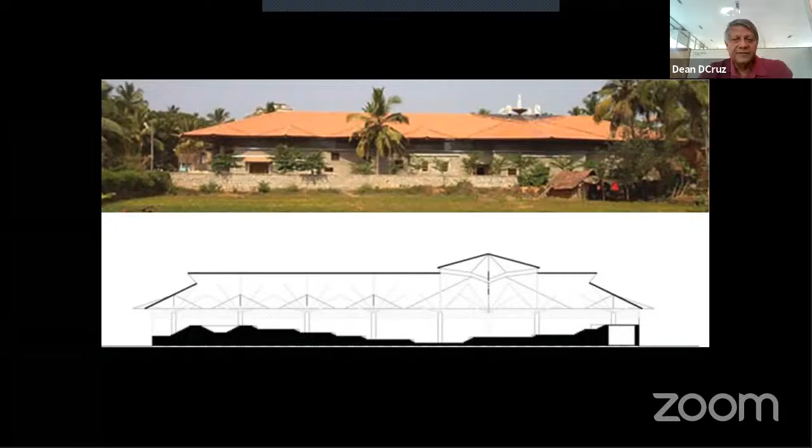And the enclosure was, of course, local granitic stone that's available. The walls of the cathedral are actually non-structural. They're just partition walls. They just wrap around the building. And the whole cathedral is like an amphitheater. It's like steps up and down. And the roof just floats above it. So you can see the roof. So it's tree-like in nature, and the walls are just partitions on the outside. And being a cathedral, the walls actually define small chapels, which are on the edge of the cathedral.

It has a steel main framing system, but it also has a wooden roof. So again, we're recalling crafts. The nuns of that particular parish even did the stained glass. The priests actually carved the wooden doors. So it was a completely participative process of construction.

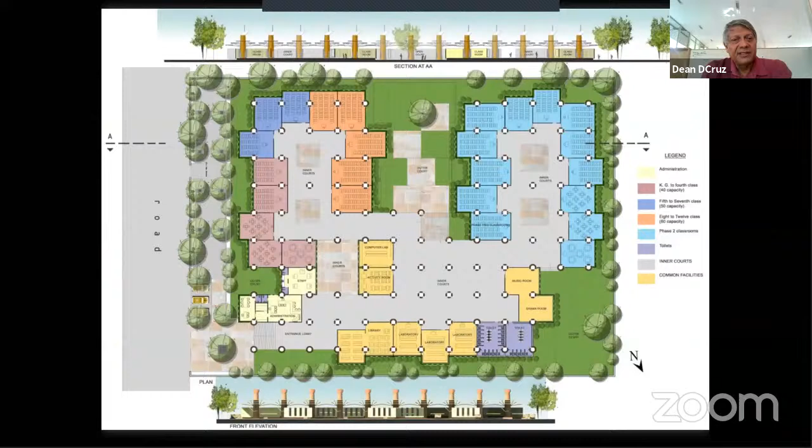This is a project we're doing in Bijapur with the same principle of creating these trees here. Now, Bijapur is a hot and dry climate. So we decided to respond in terms of cooling the building by means of evaporation. So we had these towers, which were like trees in a way, and they're made out of brick, which is a local material to Bijapur. And they're supposed to draw in air at a high level, hot and dry air. You humidify it by spraying a water mist on it, and it's taken down into these column flues and enters the building and cools the building.

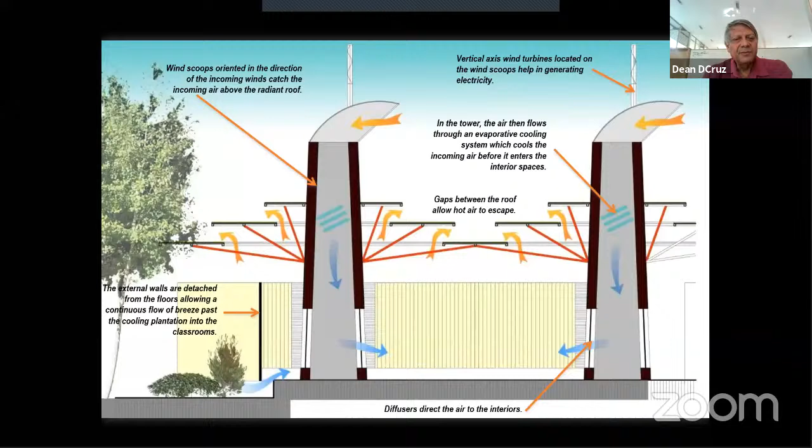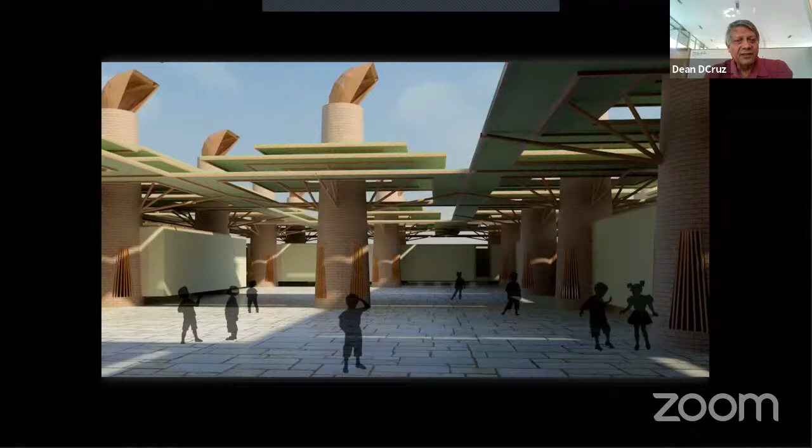And the building is completely flexible. As you saw from the plan, it was just a grid of towers, and you could actually change your walling systems around. So the walling systems were lightweight, soundproof partitions, with which you could keep on flexing the size of classrooms, location of different rooms in the building, so a great amount of flexibility. So slowly, I started transitioning back from the very earthy, down to earth Laurie Baker thing to actually looking at an architecture which had a bit of technology thrown into it, creating lightweight structures mixed with the permanence of, say, the brick towers in this case.

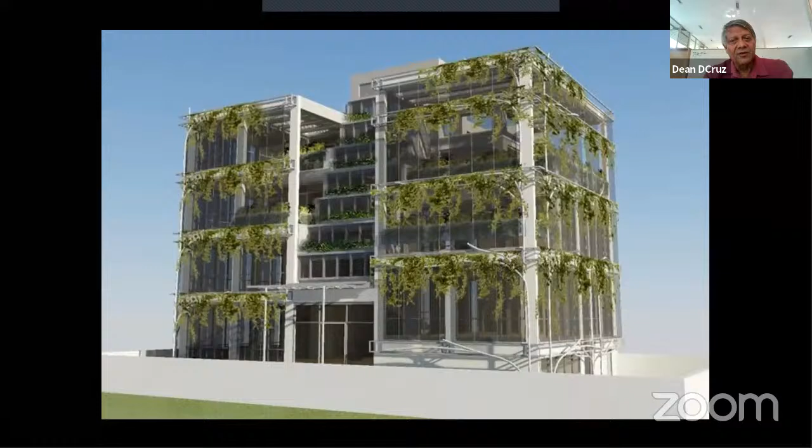So this building is also another transition back to that high-tech architecture. It's a building in Noida, which is stalled at the moment, but it's a hollow column, hollow beam system. So the columns and beams are made out of steel, but the framework of steel is like a hollow box in which all our services run. So rather than cling the services to the side of the building, or under the slab or above the slab or cutting through walls, they actually ran through the structural elements, including the air conditioning system. So everything ran through the column or the beam.

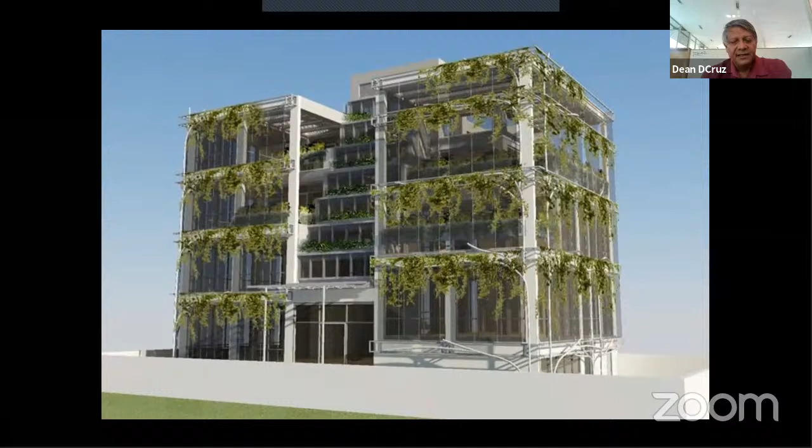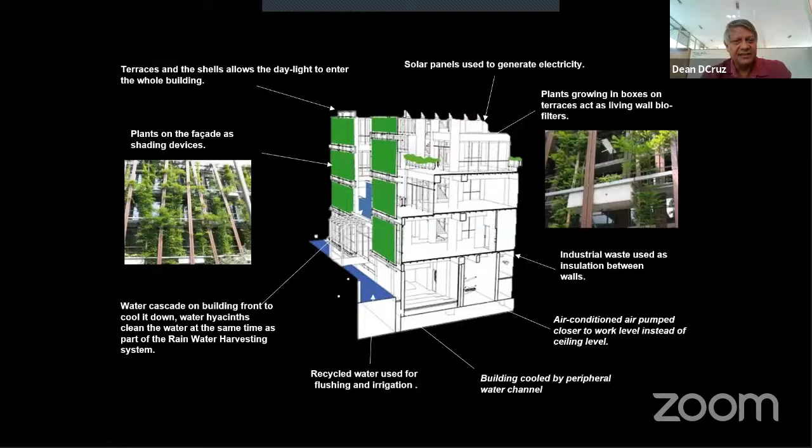So even the air conditioning system was a high velocity system like you have in an automobile or a bus. And the air came directly to where you were sitting as well. So the amount of energy usage was kept to a minimum. That's the system. And these are the various sort of interventions we are planning to use in the building in terms of solar pergola, green wall, underground cooling systems, thermal radiation systems in the building that we plan.

I mean, the learning of sustainability actually started years before that, when we were shortlisted to do the Pune Sustainability Center. This was supposed to be a demonstrative center for sustainability, and in an active way. This is almost 15 years ago. And we're supposed to demonstrate how sustainability can work in the public domain so people could be influenced and start

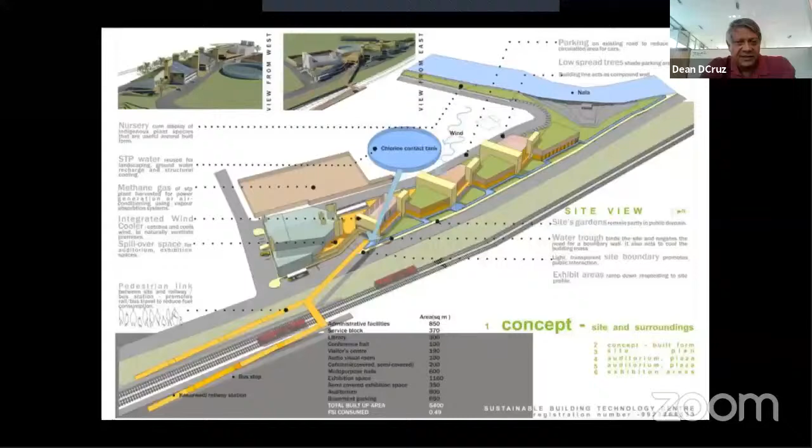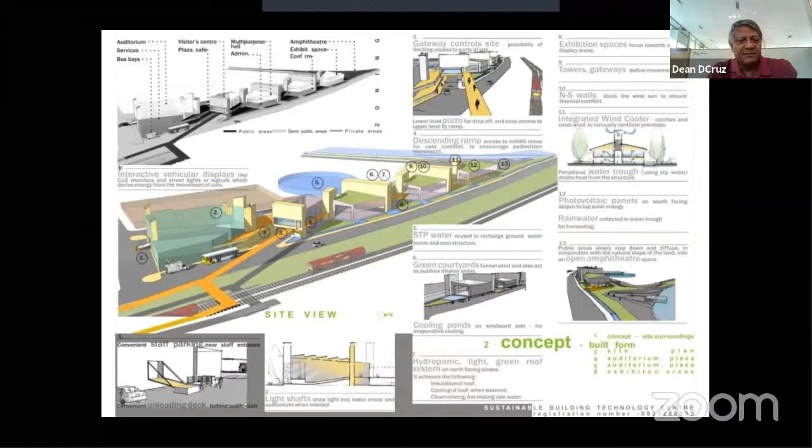using these systems. So whether it's solar energy, other passive cooling systems, new materials, new technologies that could be incorporated in the building, underfloor cooling systems as well. So all that was incorporated. So even the auditorium had a top lighting system, an underfloor cooling system, and all connected in a sort of museum of sustainability. A great learning for us.

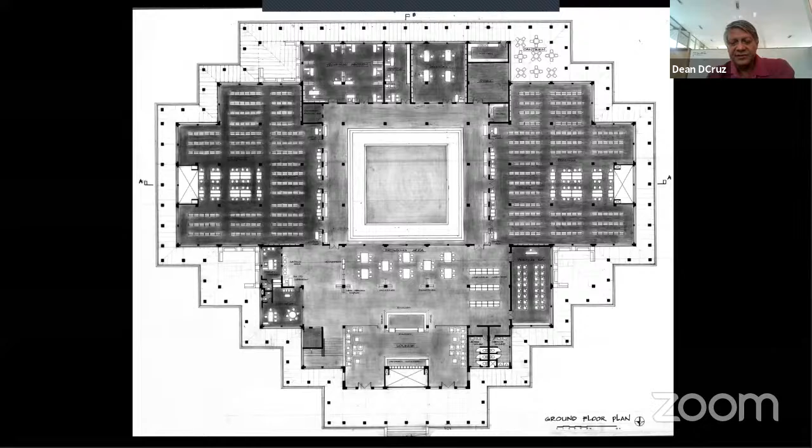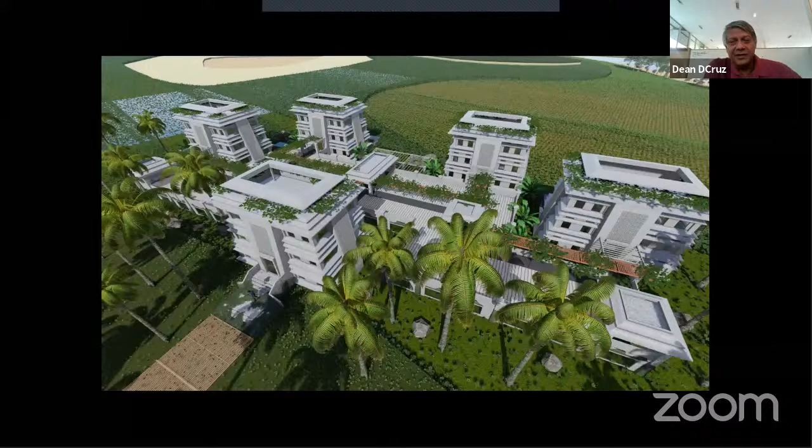So this is a hotel project that we're also doing now in Hampi. Again, how do we take the traditional stone building systems and create a thing? So it's a 3-level room thing, but again, it looks like traditional architecture built completely out of stone. And the whole idea is that the greenery actually takes over the building. So it almost looks like a ruin, a new ruin in a way.

Kerala has been another big influence for us, as you saw in the houses. And we were assigned to do a few spas for the Taj, and they were Ayurvedic spas. So we saw the Ayurveda came from Kerala. So why don't we look at the Kerala temples where all these sort of treatments originated from?

So in this spa, which is basically an old sports building which we completely gutted, we decided to respond to what Kerala architecture is about and what temple architecture particularly is about. And so what does the temple architecture have? One of the primary things it has is actually a sequence of spaces from a bright, taller outer space to a darker, more intimate internal space. So we said we needed to respond to that transition from the outside to the inside. And the outside of the building also looks very much like a Kerala temple.

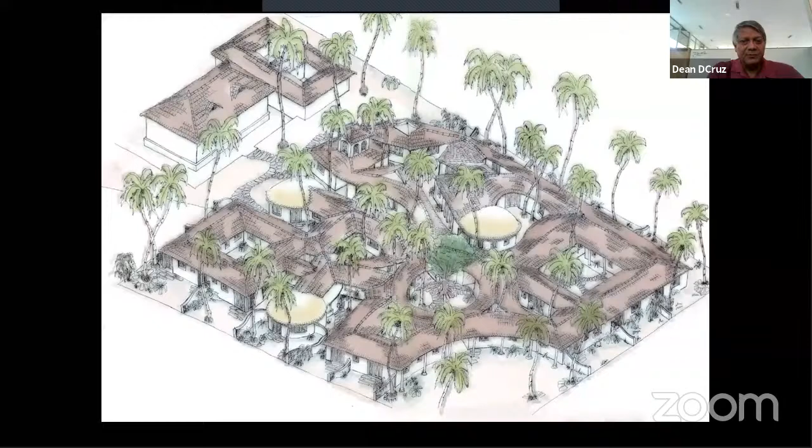So you had these streets that moved around the place. And from the street, you'd enter a square courtyard, circular courtyard, crescent-shaped courtyard, star-shaped courtyard. And each courtyard led on to various other rooms, and each room was unique in nature.

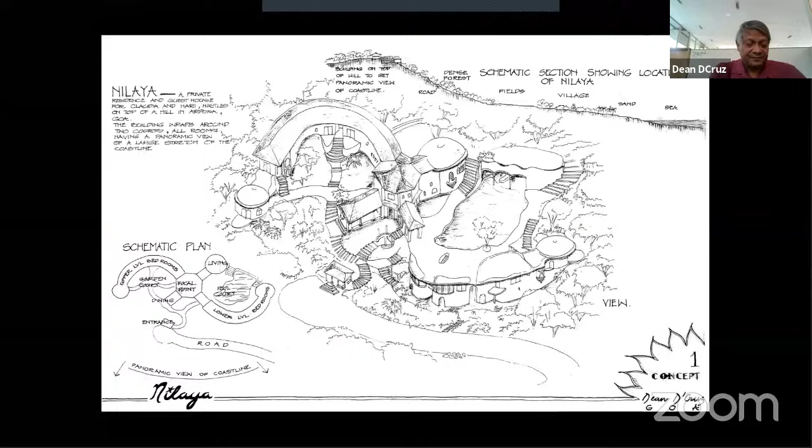This is a project called Nilaya, which was built almost 25 years ago. It was one that launched us into recognition. It was rated one of the 100 best small hotels in the world at that time. And it's built right on top of a hill, so it was difficult to get materials on top. So we excavated this pool. It's a giant pool, and all the rock excavated was actually used in the construction of the building.

It's a very east meets west sort of appearance, but again, we use that concern for the environment and our concern for restoring craft. So everything is masonry in this building. This dome, for example, is about 11 meters in diameter. It's built completely out of mud bricks with just a cement plaster on top to waterproof it. And again, traditional flooring systems in the space. There's only one concrete column in this whole building, which is where the master suite of the hotel is.

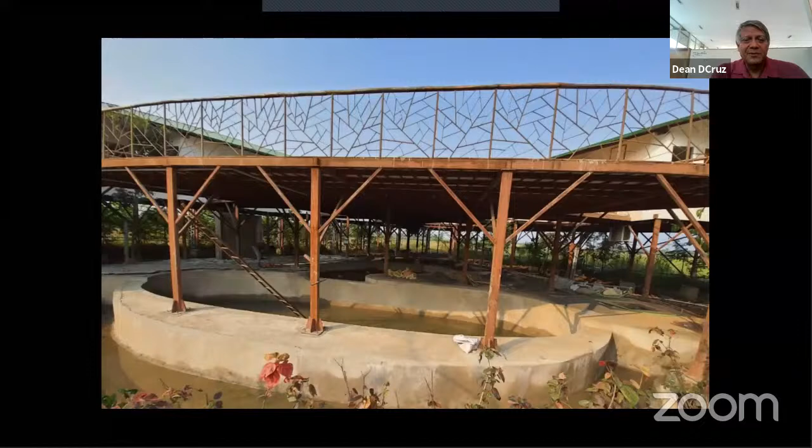This is a resort which is just being completed again in Kanha, where again it's connected to nature as far as possible. There's one that's just being completed in Tadoba. In this one, it's a very lightweight thing. So everywhere we try to sidestep a little and try and use innovative methods. The whole resort, it's still not completed, is off the ground. The whole thing is elevated, and it allows nature to flow through. The whole idea is that animals can actually pass under this thing, and you can even observe them from above.

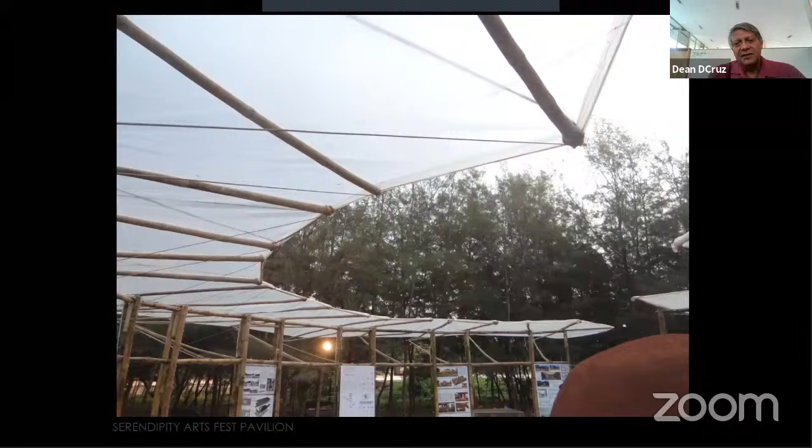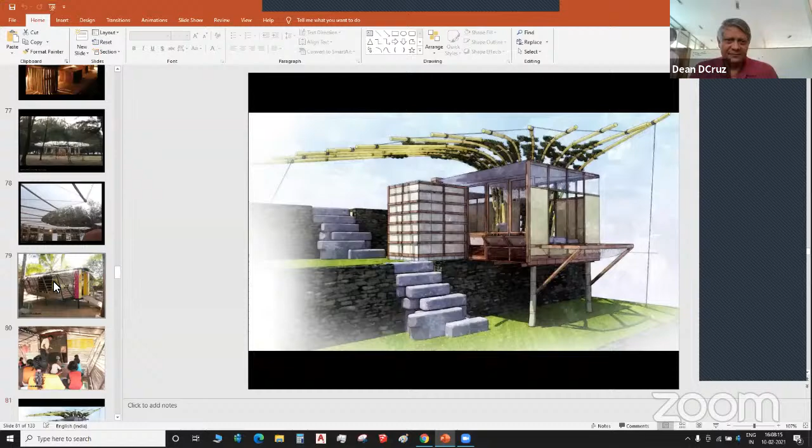I think there's some problem at his end, some network issue. So kindly have patience, and I think he'll be back soon. Yeah, he's back. Meenal, unmute him, please. He is back. Okay. Yeah, yes. Very good. Yeah. The connection got unstable. So which of the last? Yeah, this one, sir. This one? Okay, fine. Yeah.

Okay, so basically, this was what we call the moving school. So basically, it's an architecture that actually moves. I talked earlier about an architecture that's temporary in nature. What about an architecture that moves and is movable? So we did this for the Dan Aid Agency, which actually takes care of children of construction workers. So the children are able to get a continuous education, because the school moves with the construction workers as well.

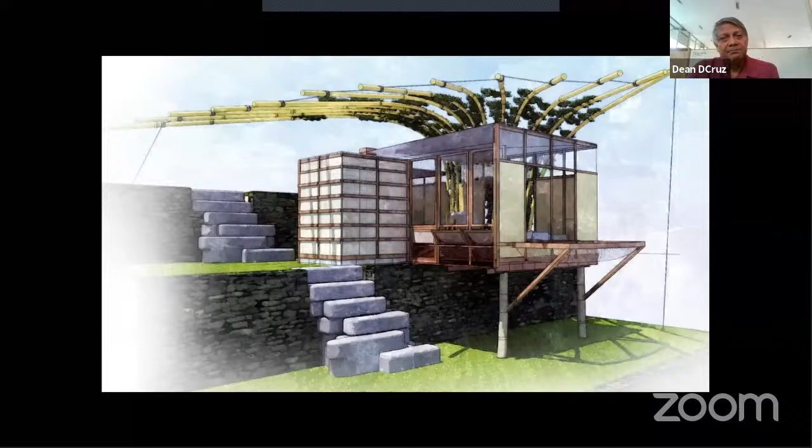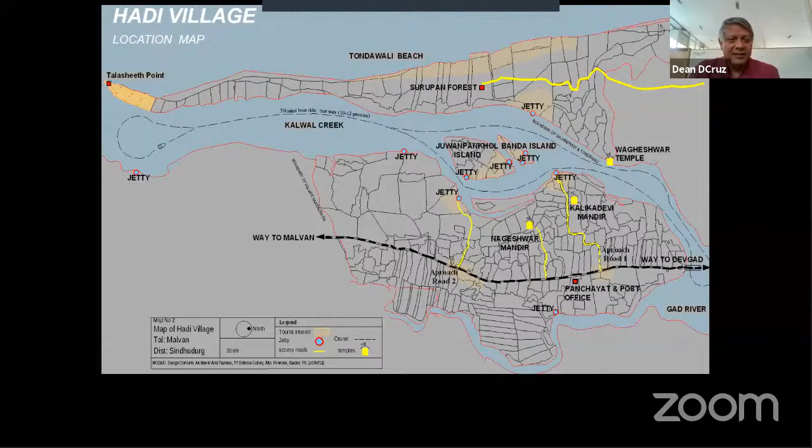But at times, it doesn't mean that we even have an architectural solution. So this is a project that we did for the Maharashtra Tourism Development Corporation. They wanted a 40-room hotel, and we said, because MTDC basically wants tourism to happen in a place, why don't we give tourism to the people? And this particular village of Hadi, which is a beautiful village, has farmers, and it's got the fisher folk. So for the fisher folk, we designed these little floating hotel boats where they can come together and form a mini hotel of their own on the water, and daytime, move away from each other, nighttime come together and cluster.

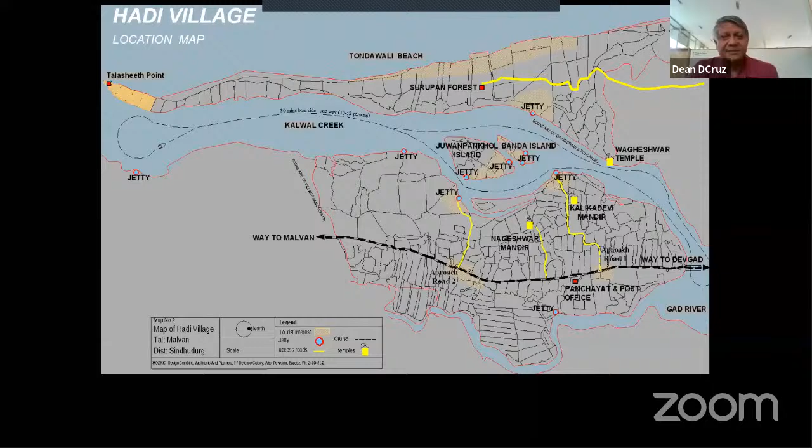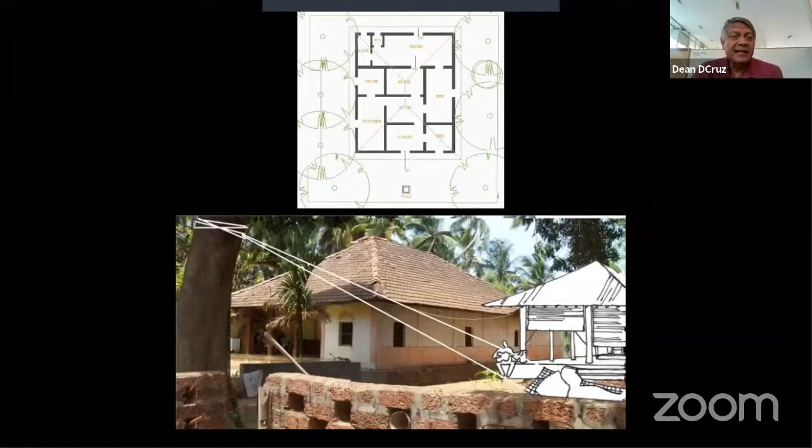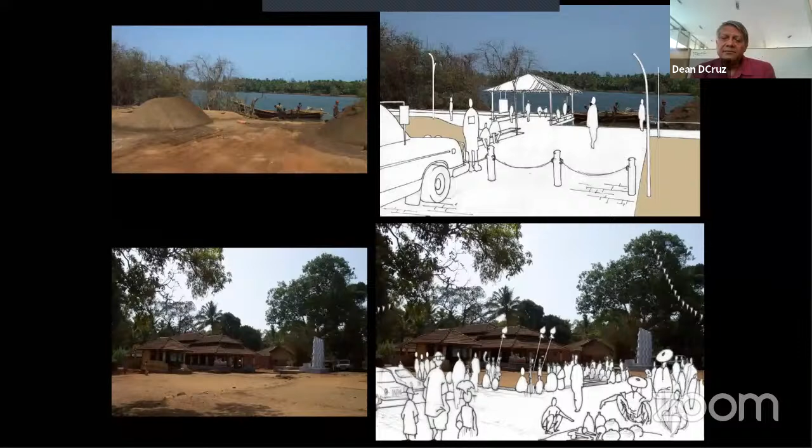And the car, despite all the ills that the car brings to the city, is still being pampered and making a city car-centric, where instead we should be really looking at mass transport systems. And the human level of things, pedestrianization, everything is being lost because of this automobile, sadly.

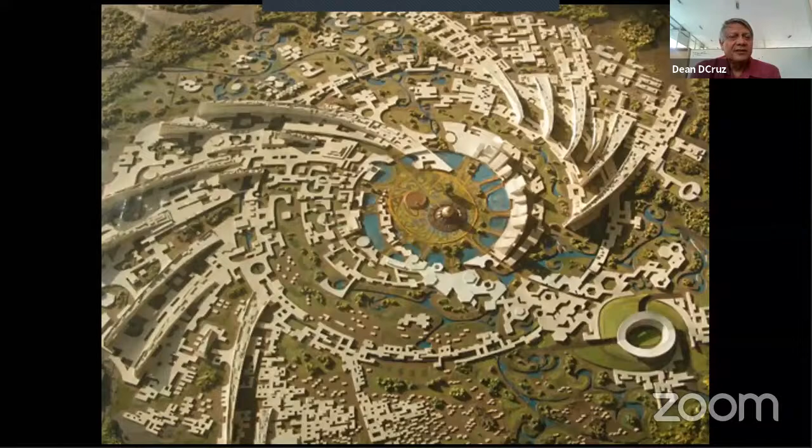But there is hope. A lot of times we see interventions, for example in Auroville, where they actually look at cities which are far more people-friendly. This is the Galaxy, which is proposed in Auroville. Unfortunately, Auroville hasn't been that successful in implementing the Galaxy model. There's a more informal model in Auroville being implemented, which is just really these clusters of communities, which is actually quite interesting because they form much more stable, much more coherent, much more likable and workable communities, rather than a very one-man top-centric planning system in a way.

So different people are trying different things. This is proposed by an architect called Tay Kheng Soon, who I met, for what he calls a modular city for Singapore. Though Singapore is fully developed now, he had said, what if we had a chance to actually redesign Singapore? How would we do it? How would we make it a walkable city? So he proposed a 1 kilometer by 1 kilometer city where he put the mechanized economy, which is basically industry and manufacturing and everything, in the center.

And you think that's very bad because industry and manufacturing is very polluting and very energy intensive. But the moment you do that, you're actually able to provide power, take away waste from that area. You make sure that pollution doesn't occur. And since this city is just 1 kilometer by 1 kilometer, you're never walking more than 500 meters from the edge of the city to the center of the city.

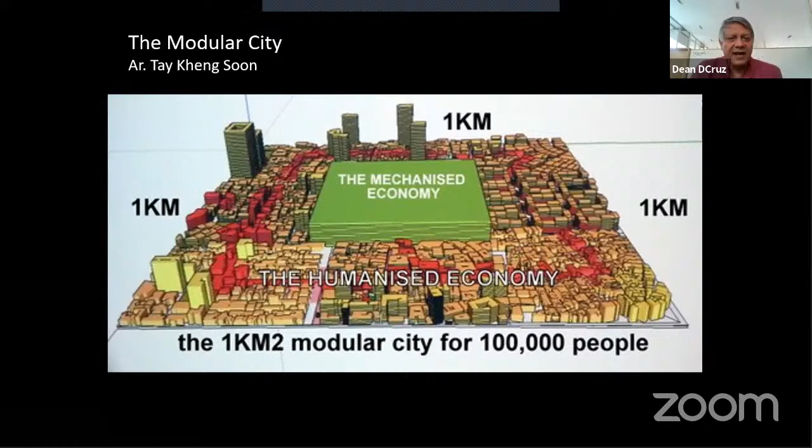And so peripheral to the industry is the commerce section, then there's shopping, and beyond that, there's the support system of schools, of hospitals, and everything that people need as a support system. And then peripheral to that is the settlement areas of housing. And beyond that is actually open fields. So because you're able to create a dense city, you're creating so much more open space.

And all the cores of the city, that mechanized economy, as he calls it, are connected by high-speed transport, high power systems, that actually connect up. So you're freeing up a lot of land in these particular areas.

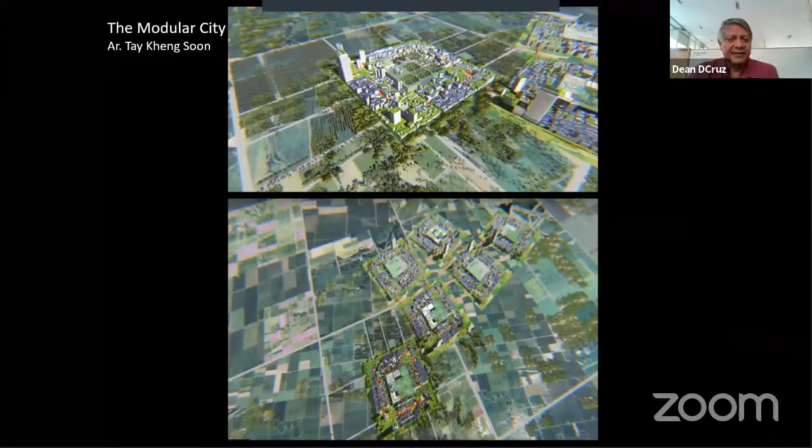I had a chance to visit the city called Hammarby, just outside Stockholm, which is actually what they call a brownfield project, an old industrial estate. And so they decided to actually look at sustainability. And this is green building today. Especially with the crisis that we have in the world, we should all be designing green buildings. We should all be looking at sustainability. We should be concerned about the climate change issues of global warming. We should be concerned about the social strife that we see all over the world happening because of bad planning.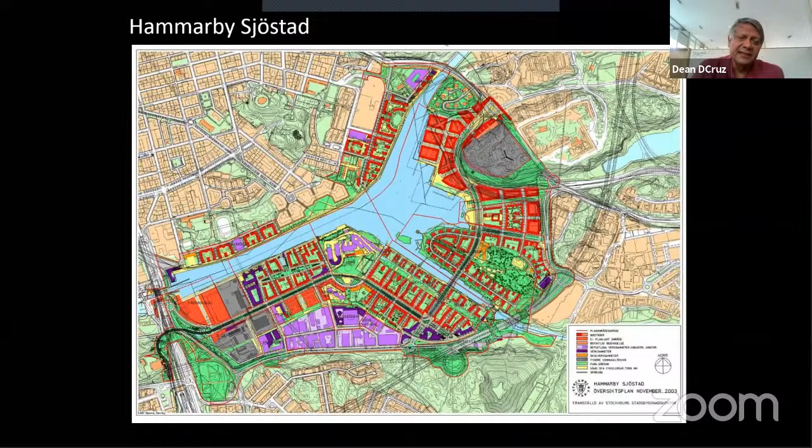So these concerns really worry me, and so I keep on looking at cities and how we can actually, as architects and designers, understand what happens, how we can intervene, even at a small level in them. So Hammarby is one place where a few architects got together and they proposed a city which is very low rise, so very low buildings, but they had all the basic principles of sustainability: of energy, of water, of how do we create community, how do we exchange economies in the place.

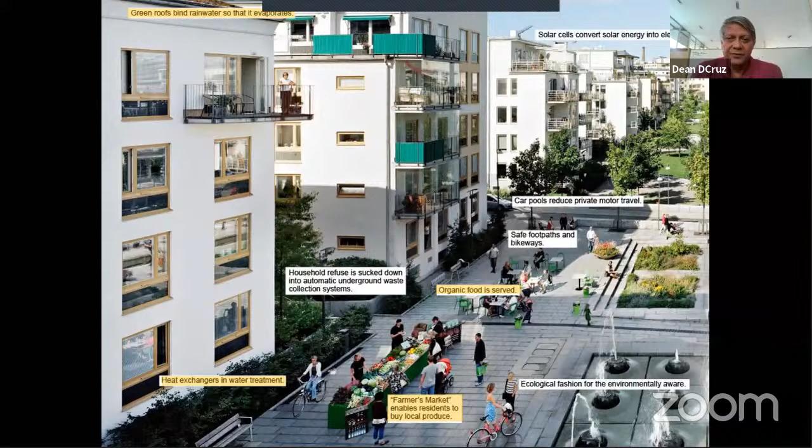So everybody had their own gardens. Even though you're living in an apartment, you had a garden patch where you could grow your own food and vegetables. You had an opportunity to actually share that with the community. So whether they were producing clothes, food, anything else, it was all ecological in whatever output they had. And the buildings are high density, low rise. So it doesn't mean an inefficient system.

Because actually they say the most efficient building, even if you want to create a high density, is a 4 or 5 story building. It's almost a walk-up building. Multi-story buildings, besides being menacing and inhumane in the way they connect to the ground, are actually inefficient. So a higher footprint of buildings, but on a low rise, is really the way to go.

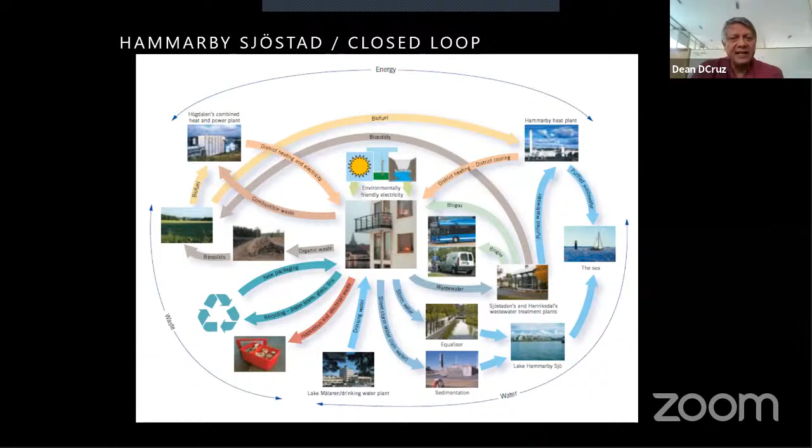And it's all about creating closed loop systems. It's all about how do you look at energy, how do you look at waste, how do you look at water, and keep on recycling it within the system. And that's the most efficient way to go about it. So this city completely demonstrated that. So about 13 years ago, I'm not just an architect.

I'm also what they call an activist, somebody who actually spoils the fun of people who want to make a lot of money at the cost of the environment. So I'm part of the Goa Foundation, which is actually an environmental legal group. And so a lot of the laws that you see today on CRZ, on forests, everything for the whole of India, have actually come through PILs filed by the Goa Foundation, which are now applicable throughout India. Of course, they're being subverted now with a government which doesn't care very much for these things, but the fight is on completely.

So I was really fighting against the regional plan that was very bad for Goa, the 2011 plan. And so for the first time in the history of India, we managed to block the plan and revoke the plan. So as punishment for that, they put me on board to prepare the new plan along with Charles Correa and Edgar Ribeiro. I'm not a trained planner, but it was an extremely interesting exercise to go beyond architecture, into the area of planning, and look at how we can really influence lives in a much greater way.

So we looked at what are the assets of Goa. You don't have to be a planner to be concerned about everything around you. An architect needs to have the sensitivity to actually look at what are the assets that we have around us. What do we need to preserve and protect? Because when we design a building in a plot, we're not just affecting the plot that we build on. It's also the environment. Where is that plot getting its air from, its water from? We need to look at that. So Goa has the assets of beach lands, forest areas, fields, orchard areas, water bodies. All this needs to be protected.

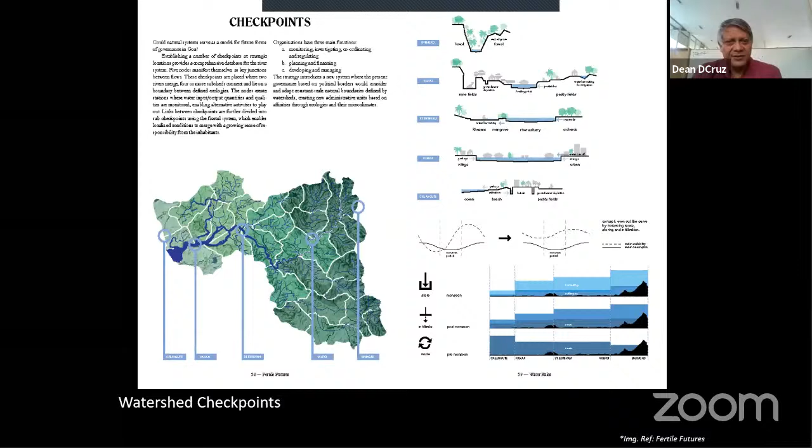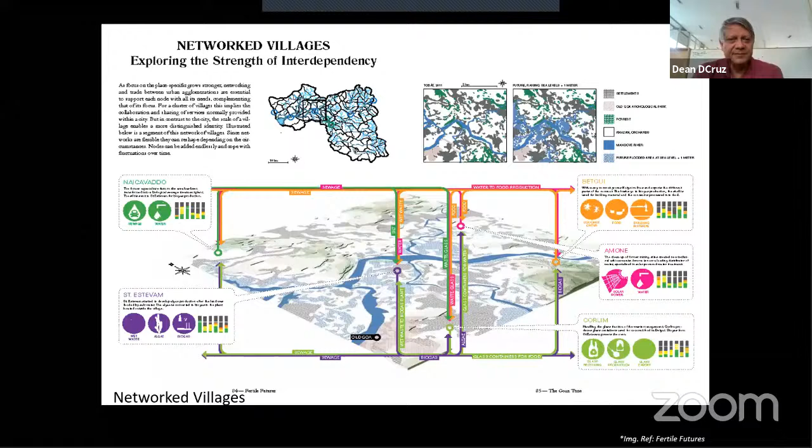We did this along with the Royal Institute of Art of Stockholm as an exercise. They sent their students down, and we developed these thoughts with their students, looking at watersheds, how they affected villages, and how villages could interdepend on each other using these fractals of development of villages. Because the village is actually a unit of development. Every village in Goa, and maybe throughout India, is completely independent and autonomous. It has water bodies, fields, orchard areas, animal grazing areas. It has an economic model.

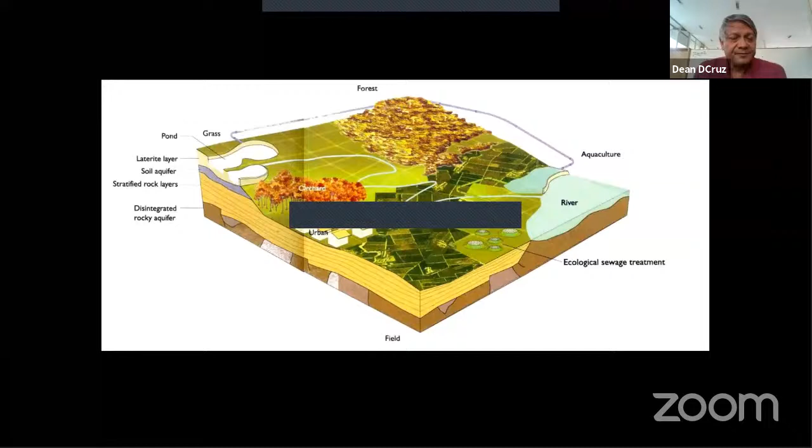So when we looked at development, we needed people to understand what development is about. So for the first time in the history of India, we decided that if we are preparing the regional plan, we have to give it to the people. We have to make them understand first, and then let them decide what their future is going to be like.

When we talk about development infrastructure, a lot of people think infrastructure is all about roads and buildings and power lines and factories, which it is, but it's also about what we call green infrastructure: where do we get our water from, where do we sequester our carbon dioxide, where do we get our food from, where does our waste go. All that is infrastructure as well, and that's green infrastructure. And the green infrastructure we need, which we think is empty space meant only for future building, is needed by us.

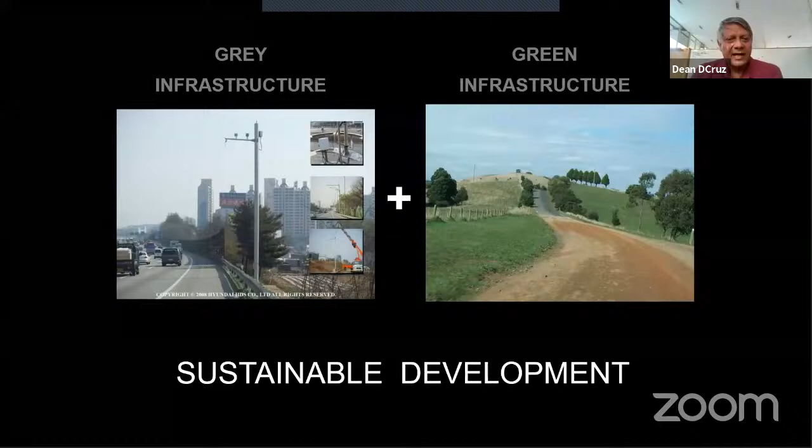And we need to map that and protect them. And so those were the eco-sensitive zones, you could say, in a way. So those times we used Google. There wasn't much of GIS systems over here. So we used Google to actually allow people to understand what the lay of the land was and what they were looking at, how they protected, to understand what basic planning was about.

And we helped villages actually prepare their own plan for the future, where roads were, whatever, but things which affected them. So in this particular village, they mapped all the nature trails, they mapped the bird nesting sites, they mapped all the big banyan trees in the village. So all these things, they mapped their aspirations. They mapped where they would like a forested area, where they would like a particular type of crop to be grown, where they would like water harvesting to happen.

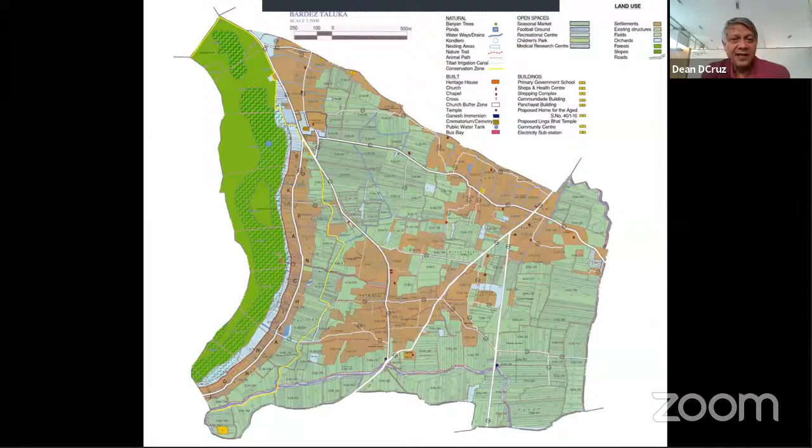All that was mapped. So suddenly you transition from just being an architect, designing on a simple piece of land, to actually helping people change their lives at present and the future lives of the younger generation. So they actually mapped where the grey infrastructure was, where the settlement areas were, and the areas for commerce, whatever, and the green infrastructure. And they soon realized that they have to protect that, because to produce the amount of food they need so much of land.

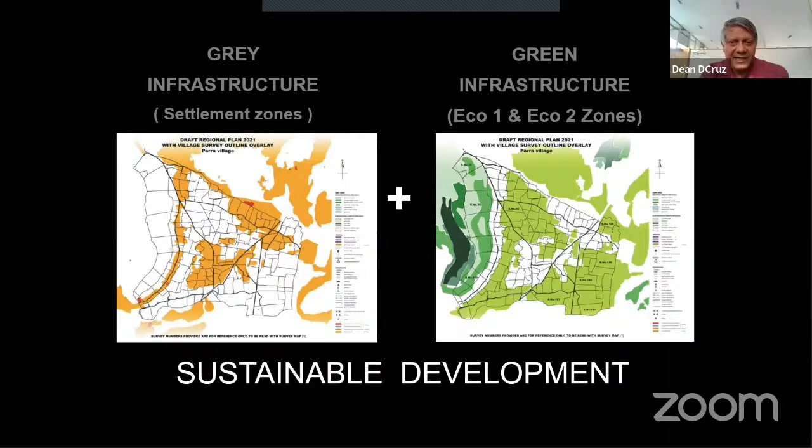They need so much of area to water harvest. They need so much of area to spread the organic matter for recycling in that space. All that need to be mapped and protected. So it was a great process to be part of, and really see people taking charge of their future.

So how do we actually get people excited? And we as architects have that ability to actually create excitement. So we normally do it when we show a project to a client. We say, okay, fine, this is what your house is going to look like, or this is what your hotel is going to look like. But how can we do it for people? How do we make people excited about their beach areas? So we created this thing along again with the Stockholm students. How do we actually let people identify and look at their future in a very different way, an exciting way?

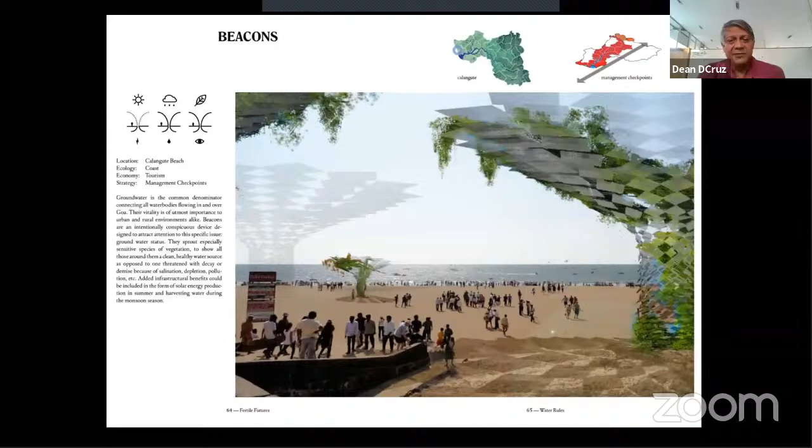So how do you protect the sand dunes? How do you harvest water in the area? So creating these sort of little points in space which provided, say, shade in the beach areas, which taught people about the environment, what's going to happen to the coastal areas as a communication, and to stabilize the soil. So it harvests water, it kept the salinity away.

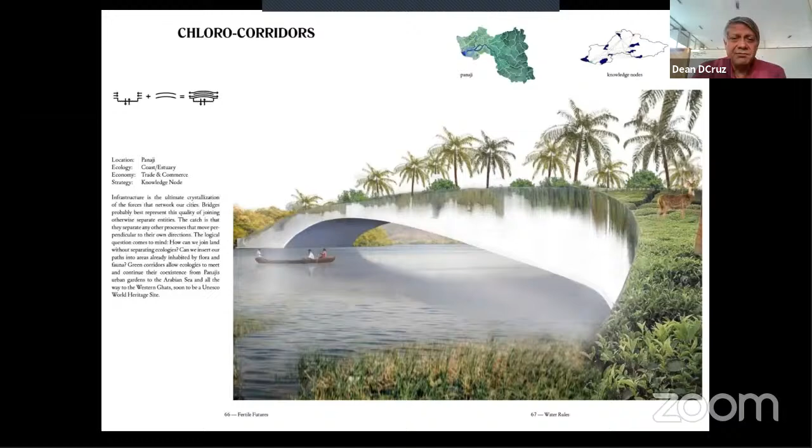How do we get farmers to understand the importance of what you call chlorocorridors, which is basically how do you cross pollinate food, how do you allow different crops to rotate, bees, butterflies, everything is part of the ecosystem. How do you actually allow animals to flow to the area, all these in an exciting manner? How do people in tourism move away from the coastal areas?

Can we provide the tourism like in Southeast Asia where you live on the land, you live on the farmland, so people experience the growth of food, the sowing of food, the harvesting of food, the eating of the food from the land itself. So they connect immediately to the soil itself. So how can we actually get people to connect to the land in some way by creating that experience and moving away from the typical model of tourism?

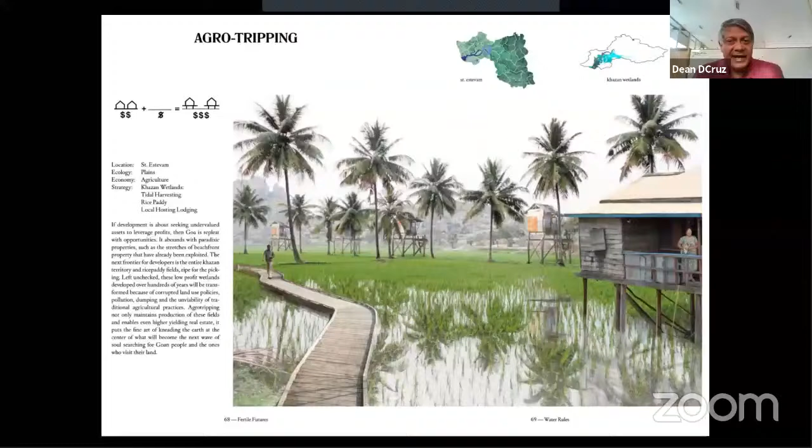How do we get people to experience the forest, and to connect to the forest in a very low footprint manner, so they understand the great diversity that we have in our forests, which we're losing extremely fast. You look what's happened in Uttarakhand and all. Because of development, we tend to lose that connection to it. So we need to get people to experience it in these little snippets so that they identify with it, and everybody starts protecting, not just environmentalists. Every citizen of India needs to start protecting these great assets of nature that we have.

For me, a great inspiration have been architects who actually worked with the people. Christopher Day is one such architect who doesn't design individual houses, nor does he design large housing complexes. He designs with communities. So he actually brings people together, an average 10, 12 families, and gets them to plan their little settlement of their own, very much like what's happening in Auroville, where small communities come together and they plan what the future is. So their houses turn out really small, but they have a lot of common facilities.

They have maybe a large common kitchen, dining, living space, and they all share the chores, whether it's bringing up children, whether it's creating food for the community. All that is shared. So rather than individually have the chore of actually doing this daily ritual of cooking or caring for the children or cleaning, whatever, it is done collectively as a community.

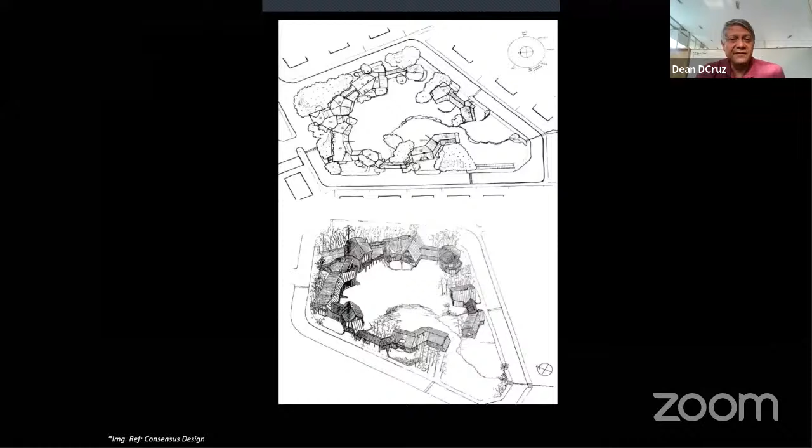And you can see the richness of these communities and the great sort of expression and growth. Things like homeschooling, exercise that have happened today, alternative methods of healing, all have actually sprung from little communities like this. We seem to have lost our sort of connection to the past.

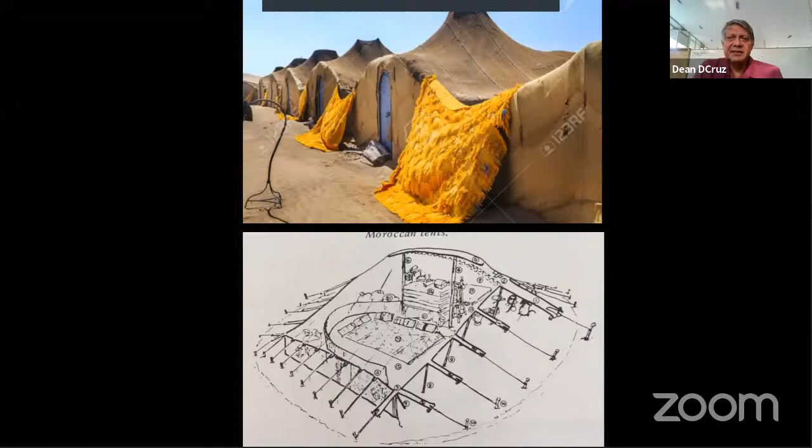For example, if you look at, say, the architecture of the past and the mud architecture, you think it's old-fashioned, there are big problems with it. But you see the architecture, even mud architecture that exists today, is extremely exciting and so easy and economical to build, even multi-story for that matter, in mud, for example. And even if it's temporary structures, people are still building in these ways, and we're losing it fast, no doubt. But it's a great inspiration.

And even things in the past sometimes look almost like they're from the future itself. So all these are inspirations in architecture, which shows how much we've evolved over centuries and how fast we're losing it today. And it's important that we as architects really recognize that.

Or again, people like Revathi Kamath, who unfortunately passed away a year ago, who really worked with traditional craftspeople and created these homes which are so connected to the ground, or Neelam Manjunath, who works a lot with bamboo and other natural materials. Each one showcasing the way to the future, or sometimes not even an architect, like Didi Contractor, who at the age of 50 started designing and building houses and using local craftspeople to do that in a very sensible, almost Laurie Baker-like way.

So all these are great inspirations for me, of people who are actually pushing the boundaries and showing where architects can be. And yes, sure, you can be an architect designing high-tech, multi-storied buildings in cities, but you can also be an architect that actually serves the community. The choice is yours when you move into the field, but it doesn't mean you have to go into it immediately. You sense what your real calling is, and you respond to that in some way. But it's important that you look at what all is possible and where your heart lies before you make those decisions.

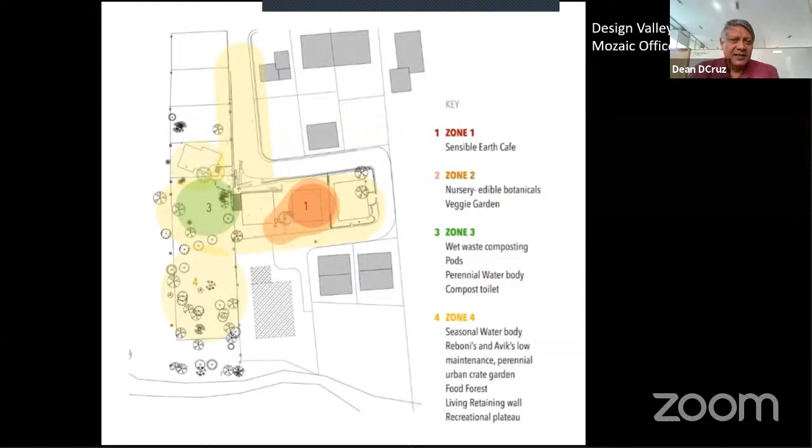So our office actually consists of three main buildings: the architectural office on the left, the product design office on the right, and the design center. And the design center is really the place where we reach out to communities, where we demonstrate how sustainable one can be, how we actually push the agenda, and make people aware of what sustainability is. Our offices are off the grid, we run on solar energy. It's not completely everything that we need, but whatever we can, we grow. And those are two of our buildings over there.